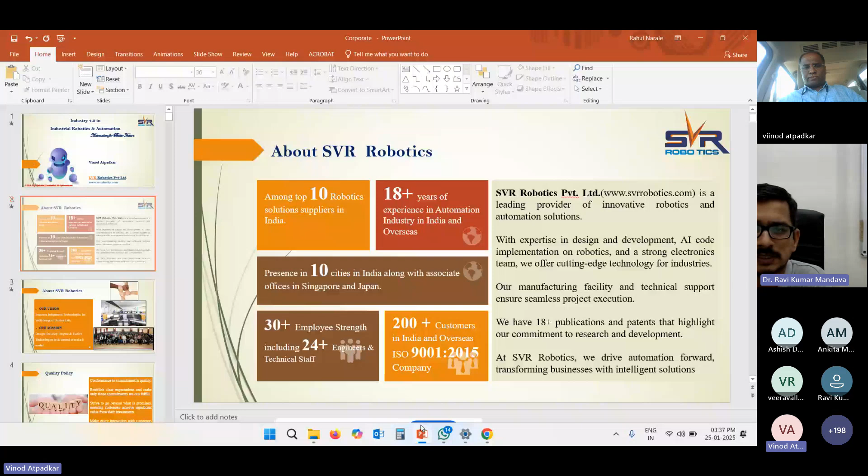Yeah, thank you, sir. Thank you very much. Thank you for giving this time. And it is always good when we talk about the same domain people, where we get knowledge sharing also. We also try to understand a lot of things, what other people are doing, how we can also develop, how we can nurture our product. So we always try, when this kind of events happen, to take this opportunity.

So today's presentation would be on robotics, basically on Industry 4.0. What we are doing, we'll try to showcase you, apart from different applications in this domain which we have already done.

Our vision was very clear: innovate indigenous technologies for the well-being of human life. We thought that whatever we are doing in robotics, we should cater to society, and that's how our mission also evolved.

We are based out in Pune. Our head office is in Pune. We have local offices across India, and basically the salespeople take care of those regions.

Basically, when we started the company, we were very clear that whatever components we are developing, we should adhere to our quality policy. We started with that goal only, that conformance to the commitment is quality. We were very clear that whatever we have committed, we'll do that, and we'll support R&D and research development activities. That's where SVR has been into this domain, and that's where the sustainability has come into this domain.

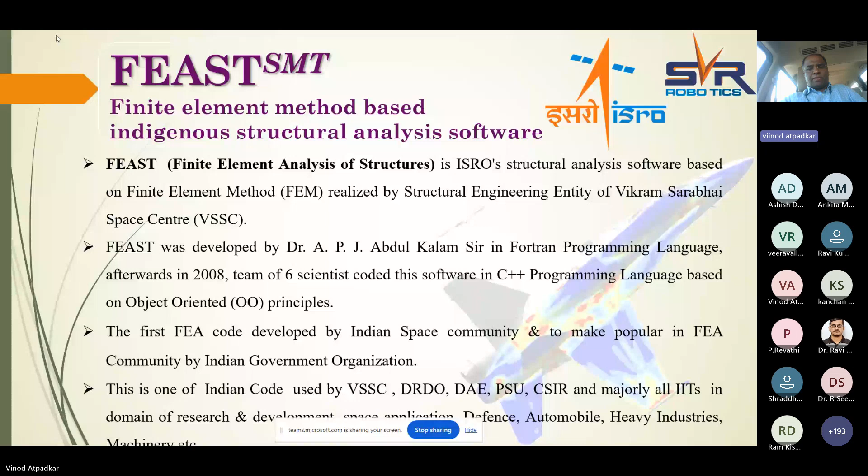So this FEAST finite element analysis covers structural, thermal, linear, non-linear, and multi-body dynamic analysis for robotics.

As I said, with Bhabha Atomic Research we are into cleaning robots. Parallelly, we make small equipment, like small grippers or crawling robots that can move through pipes of 50mm and 70mm diameter, which are two standard pipe sizes. An important function is that while moving, it also has to do inspection. If during rust formation some component has fallen down, that crawler has to bring that component back as well.

So we are developing small equipment for the robotics division at BARC.

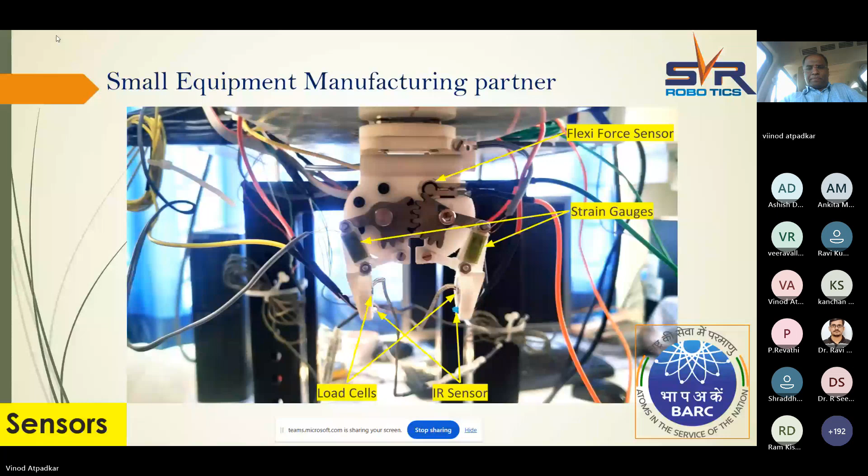Now coming to our main business verticals, we are basically into three core disciplines. One is robotics and automation, where arms, parallel manipulators, or serial robots come in, as well as automation. We have AGVs which help with logistics applications, and then we have a software domain which helps with design development, concept development, and practical implementation. These are the three different verticals.

If I want to look at it from a product life cycle perspective, we are involved in each stage of the product life cycle, starting from the design part, then the manufacturing part, and then the implementation part.

Wherever basically we cater this into robotics, we are there. It may be technical activities, repairing, or development of code, something for an inspection part. When I come to Industry 4.0 and how industries are geared up, you will see the component, they give the different component, you have to analyze that component with your real time component, find out the defects, and then in production if it is acceptable it has to be accepted and go for the next station. If it is not accepted, then it has to be rejected. That's how we are working in this domain.

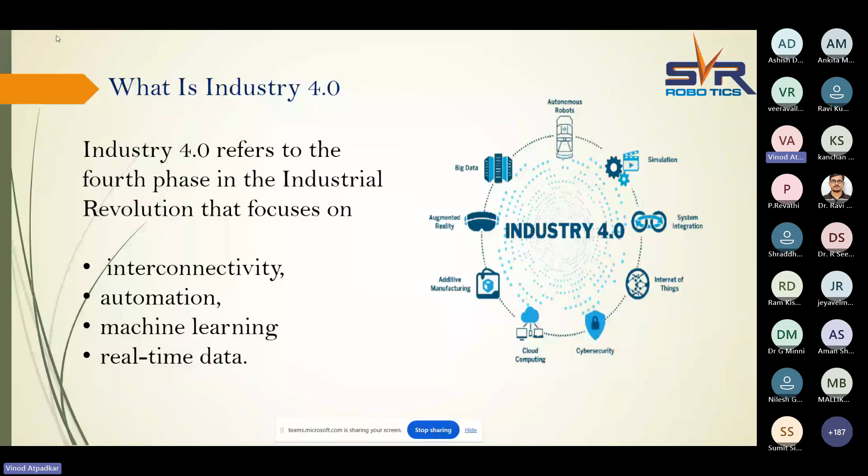As I said, there were three different phases that came into industrialization. Initially it was a mechanical stage, which we call Industry 1.0, where all the things were in a completely mechanized state, like steam engines and all those things. Then electrification came, where the manufacturing process went from mechanical to electrical. Then 3.0, where automation came into the process, where robots came into play.

And now from 3.0, we have shifted to 4.0, where it's not only automation, we are getting real time data which will help the industry increase its profitability. How they can increase their profitability, how they can increase their production, how they can reduce their timing and all those things.

So how is Industry 4.0 helpful in manufacturing? It does things like supply chain management - from supply of raw material to the end product, Industry 4.0 helps keep complete records of where the product should go, what inventory is maintained, what is the dead time of the inventory, when the product will dispatch, and when it will go to the end consumer.

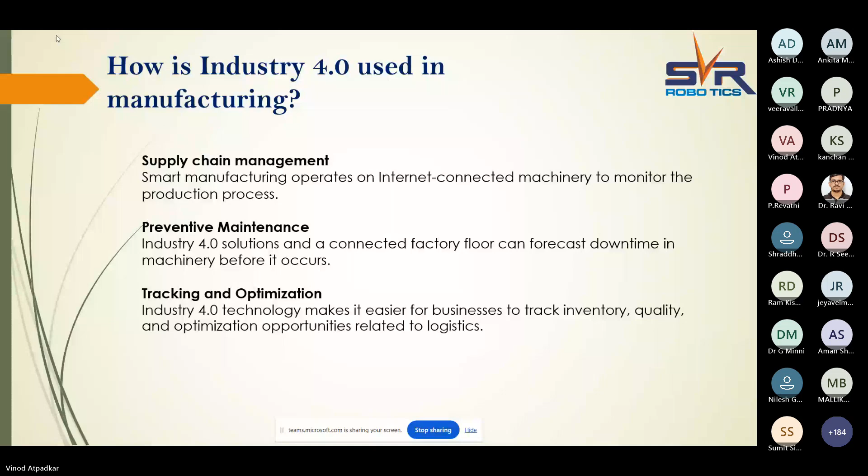What are the advantages of robots in Industry 4.0? Articulated robots or any kind of automation help increase productivity. As mentioned, there's a problem today in the market of getting the proper person at the proper time and place. Getting skilled labor into the market at the correct place is difficult - a person can be skilled, but is he skilled enough to do my specific work? So getting such a person is problematic, and robotics have helped here to increase productivity.

With the help of robotics or automation or any robotic components, we can keep complete data - how much time of work has been completed, what products were processed, how many working hours the robot worked. We can have complete data collection.

The initial cost for implementation of robotics is high, but if I calculate the ROI and the complete working life cycle of the robot, the total cost is reduced.

Quality also increases, as getting skilled labor is difficult, and there are chances of mistakes since we are humans. But on the robot side, mistakes only happen if there is a fault in the component or in the robot itself. If proper maintenance is done, the complete system will work fluently, producing good quality products. In this way, robots are helping in Industry 4.0, and companies are getting more profitable.

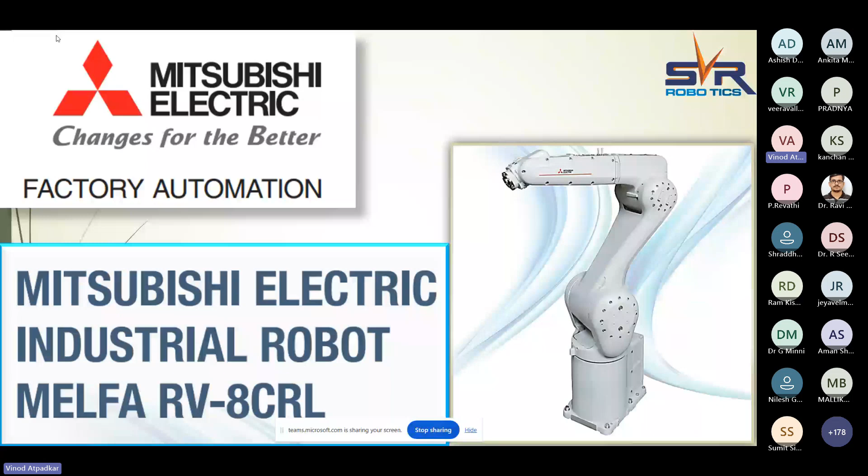As mentioned, we have association with Mitsubishi and Fanuc. We provide articulated robots, robotic arms - horizontal robots, vertical robots, Cartesian robots - whatever is as per the requirement of the industry. These arms can be used for different assemblies. To date, we have catered to the welding industry, headlight gluing industry, pick and place industries, different painting industries, and assembly industries. Wherever robotic automation is required in an industry, or a complete automation process is needed, we have catered there.

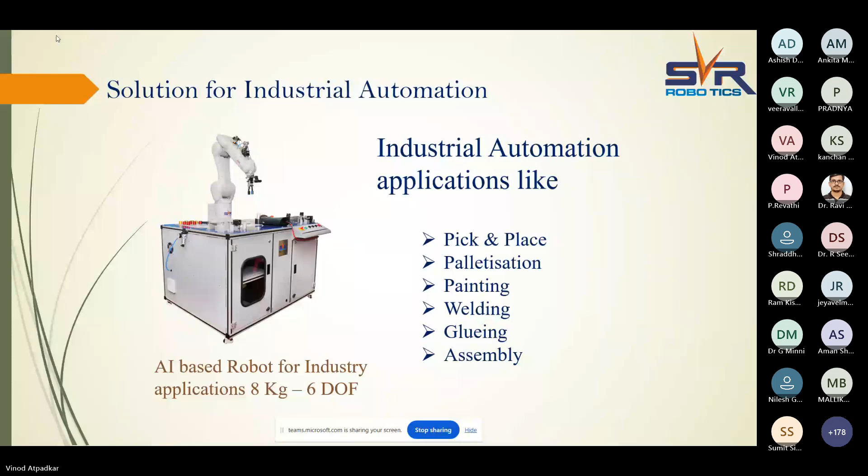Along with that, we also provide vision systems or AI systems. In some companies, we had to do a scanning process where the product had to be scanned and checked whether it was okay or not. If not okay, what kind of fault was in the product - whether it was a manufacturing defect, an end finishing defect, or any other defect. For these types of systems, we provide different kinds of vision systems or AI systems.

So this was one of the examples of what we provided for one industry, for sorting of components. This was a research lab where they wanted to sort components based on colors.

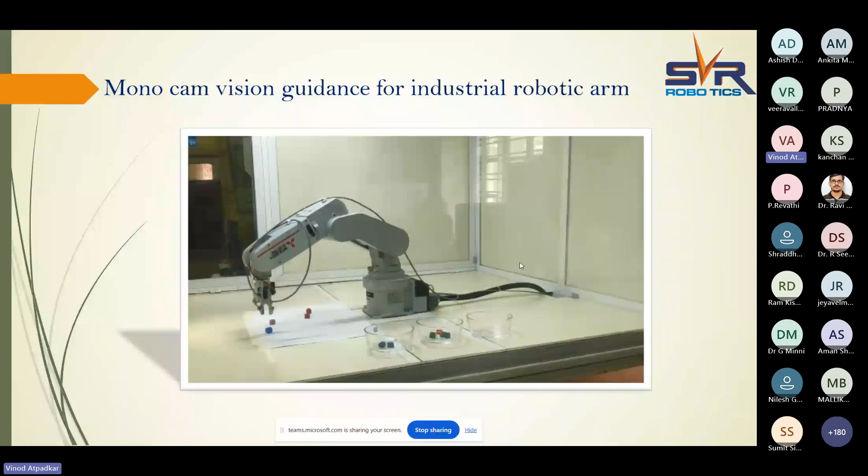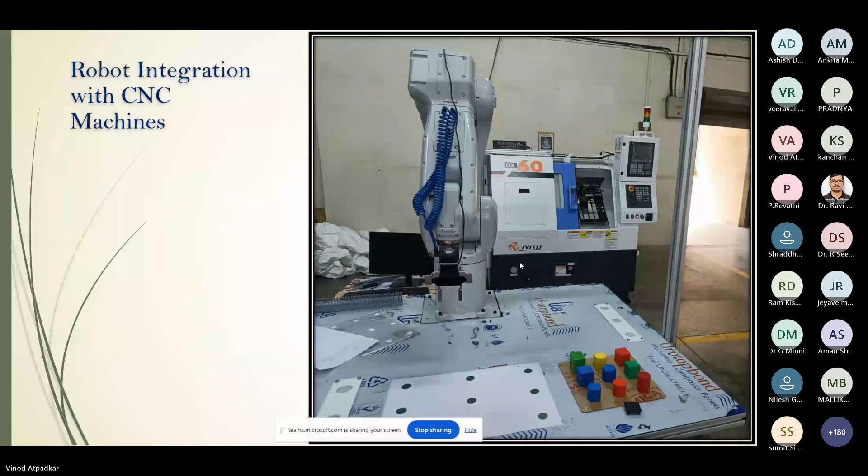This is another example where we had integrated the complete automation process, like different robotic arms with CNC machines, where we did different applications. Initially, the drilling application was done, then the milling operation was done, and later there were two different robots to check the quality of the product, whether the operations were done correctly, and the assembly would take place.

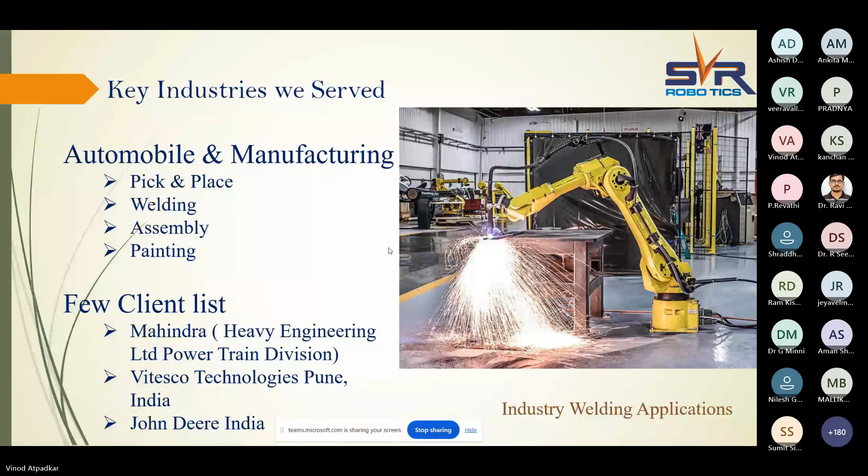So this is an application of a welding project using a robotic arm for welding.

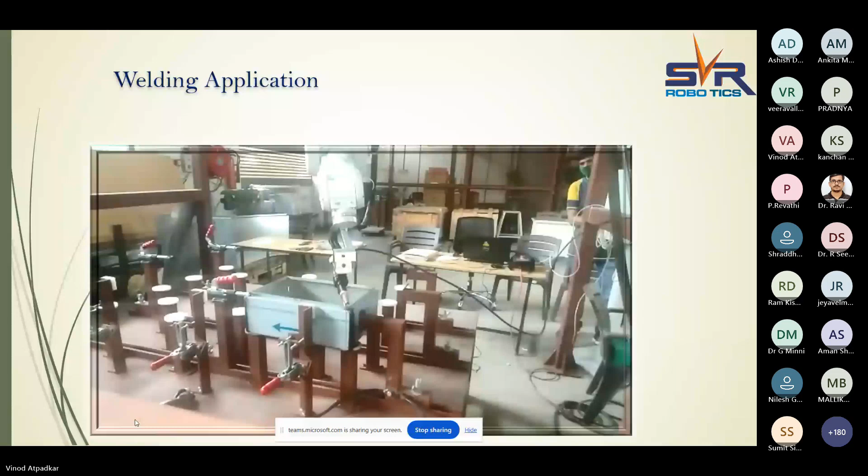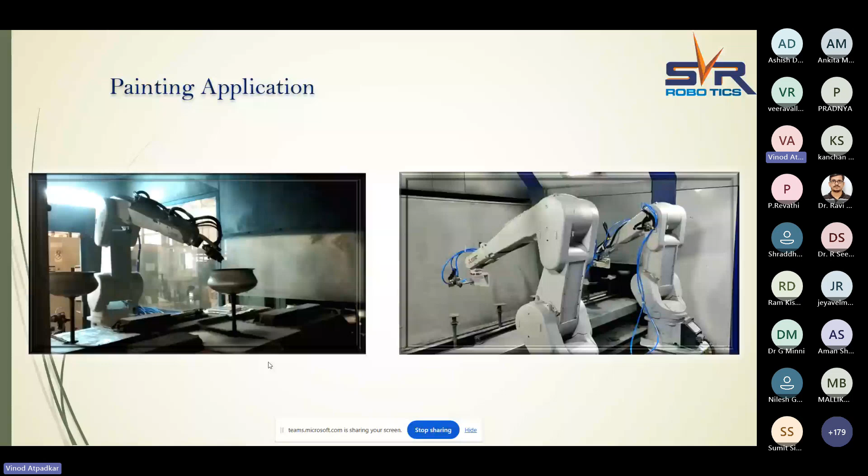The purpose of showing all this is demonstrating how robotic systems are helpful in industries, how different robotic arms are used in the industries, and how they are increasing the profitability of the companies.

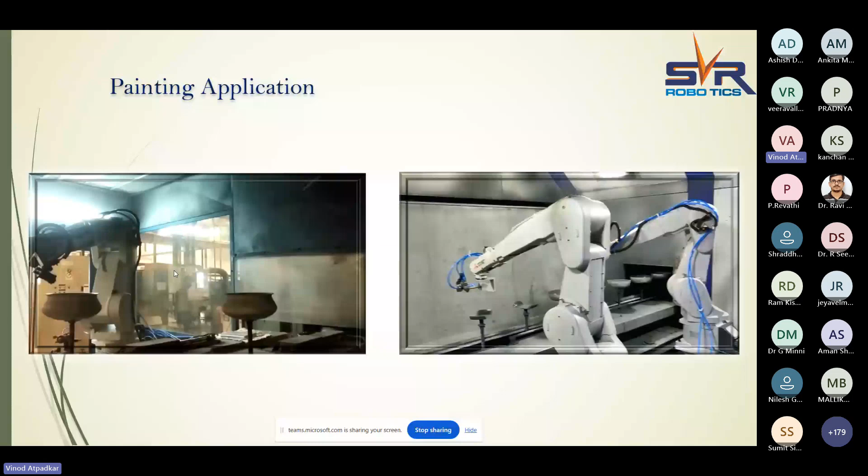Here you can see both of these robots work in collaboration with each other, detecting whether a proper coating has been done or not, and if the first one misses out, the second one continues with the coating process.

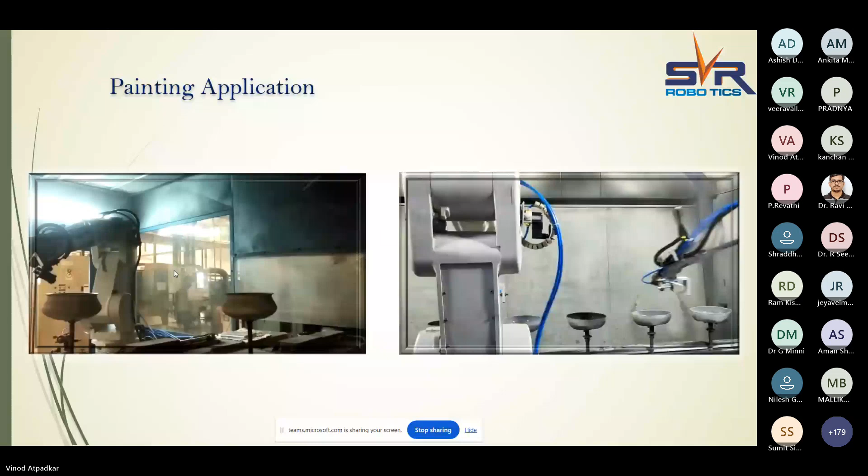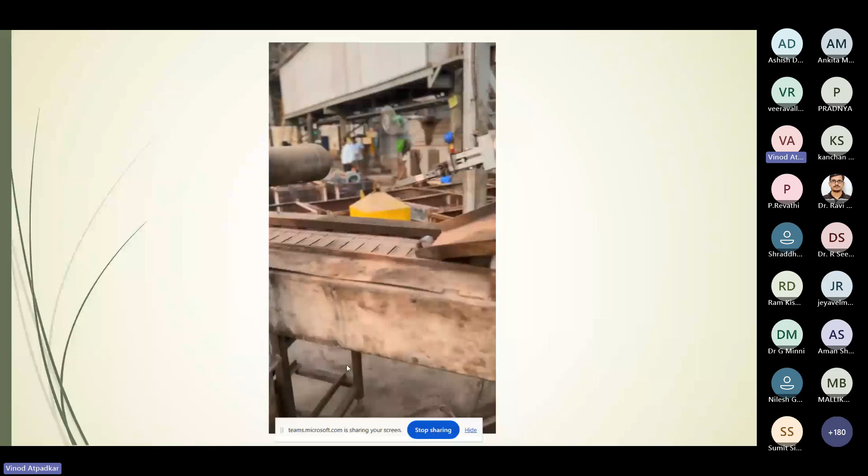So these are some of the images of the actual robot installation at different companies or organizations.

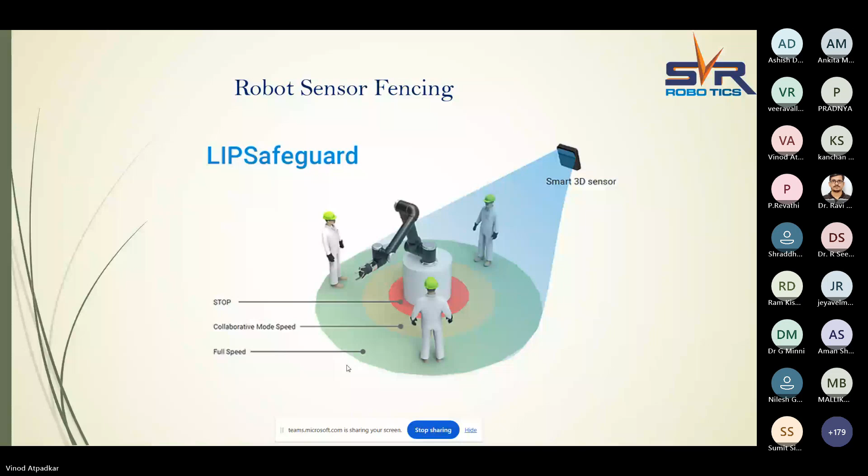We provide different kinds of articulated arms for different applications, for industries and for the education system, where we integrate different kinds of operations as required. We integrate different kinds of vision systems, for color sorting, shape sorting, and we can do different types of applications like welding and painting.

This is one of the applications where we have used a robotic arm for 3D printing.

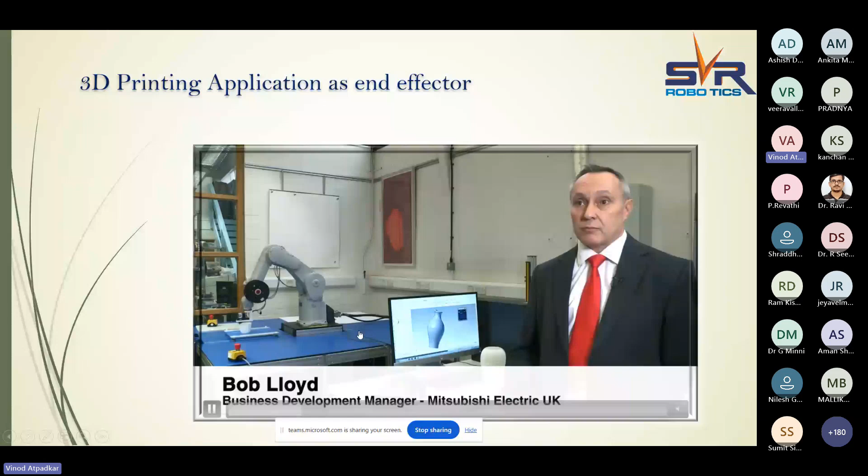Different kinds of robots have been provided from our side for different applications. We cater to industries like the hotel industry for preparation of different components, and we have also catered to automobile industries.

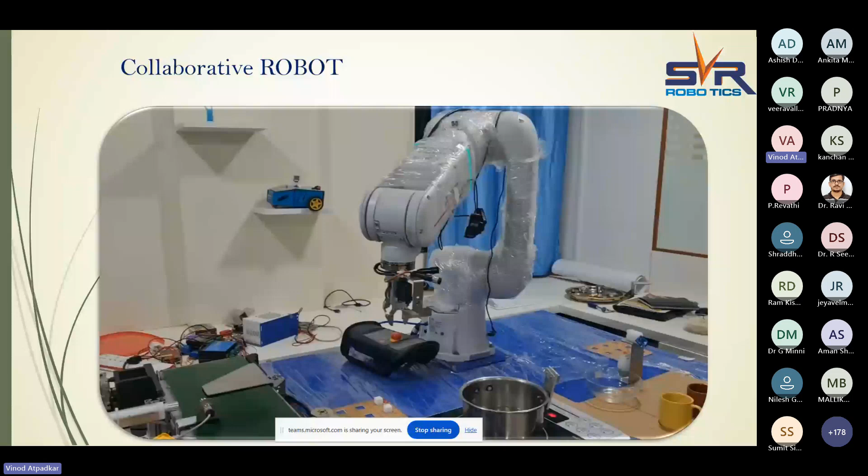So these are the different kinds of robots that we provide for the companies, and the complete setup is given.

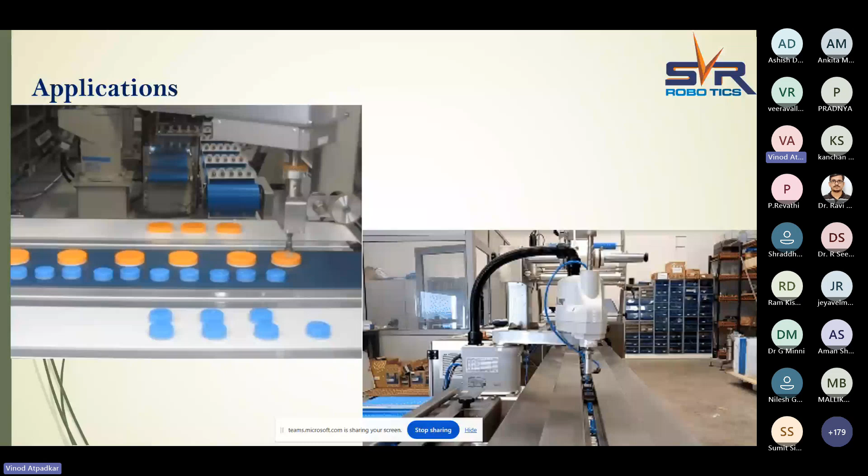These are applications where pick and place has been done depending upon the colors, sorting based on the colors, and then packaging it.

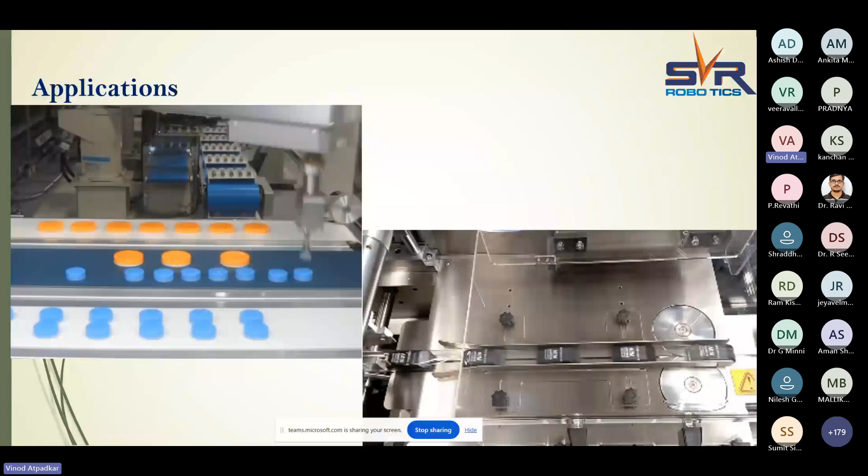Along with all the industrial robots, we provide different kinds of end effectors that are helpful for different applications. We provide industrial robots for painting, with different end effectors like pen holders, brush holders, and spray painters. We also provide laser engravers, which we buy from a third party and integrate with the industrial robots for different engraving applications.

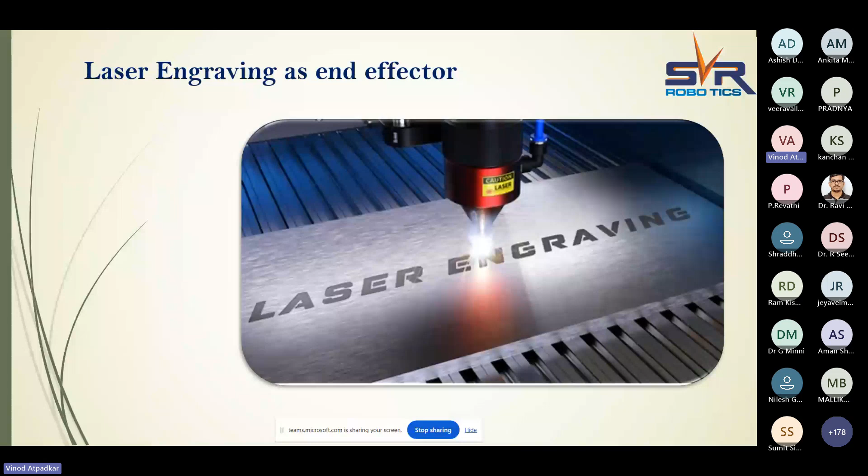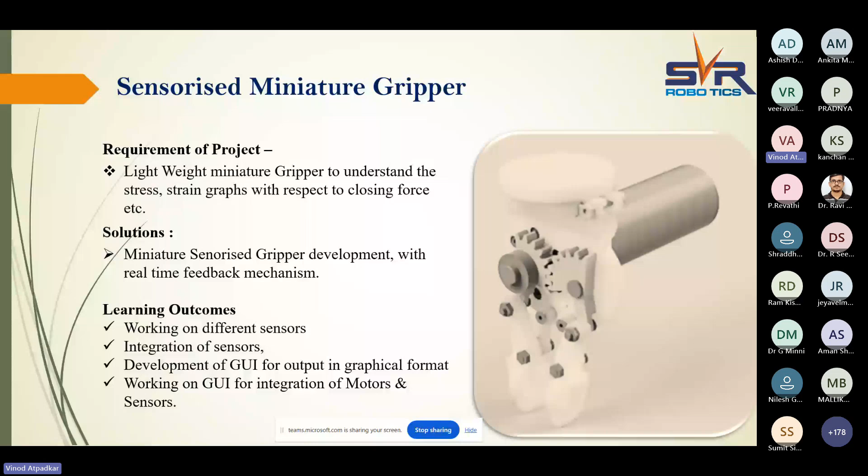Our major customer is Bhabha Atomic Research Center, as they do different types of R&D for their products. These are some of the images of the grippers we provided to BARC.

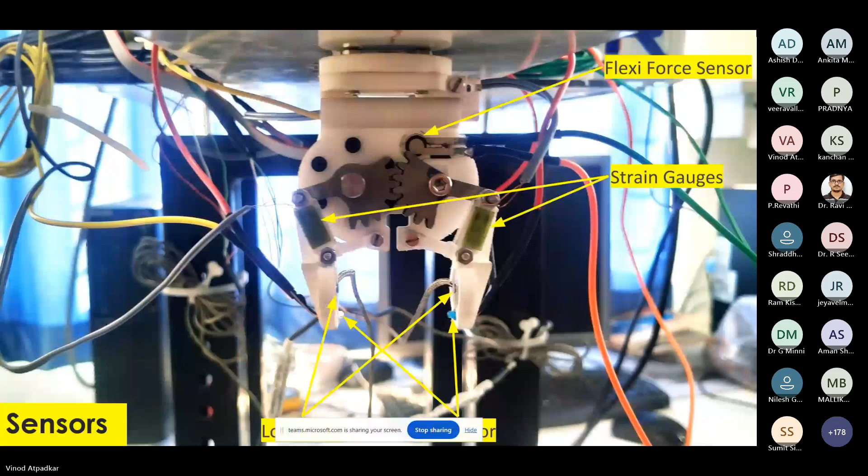These are the strain gauges mounted on the grippers. At the front side, the blue color is the IR sensor which would detect whether the component is present or not. At the center there is a load cell which would detect the force applied on the product, and we also had a flexi force which would detect what kind of deformation takes place on the gripper during the gripping action.

These are some of the grippers that have been developed by SVR, designed and developed at SVR Infotech. These are our patented grippers, we call it Grabo. We have these grippers ranging from 1.2 kg to 10 kg payload.

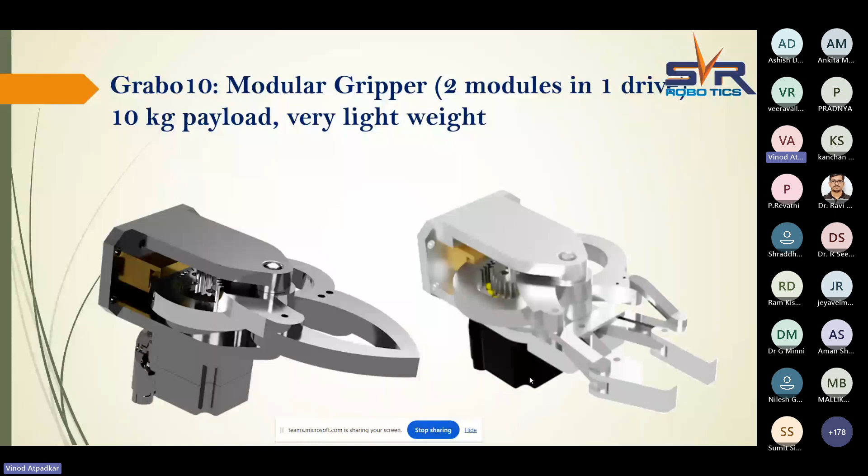The highlight of this type of gripper is that they have replaceable jaws. Many electrical gripper companies have fixed jaws. Pneumatic grippers have replaceable jaws, but electrical grippers typically don't. So we designed and developed a complete electrical gripper with replaceable jaws, where the base body remains the same and the top body or jaws can be changed as per requirement, like parallel jaws or curvilinear jaws.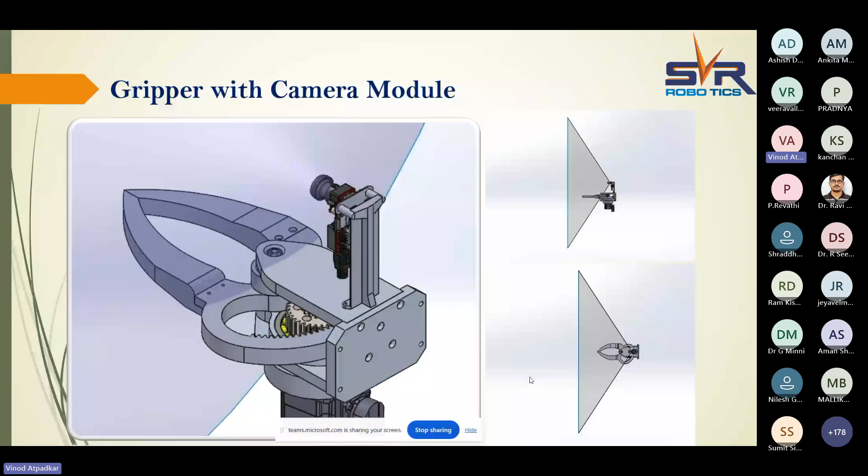Different sensors or modules can be integrated with the gripper for different applications. So these are the actual grippers, what they look like.

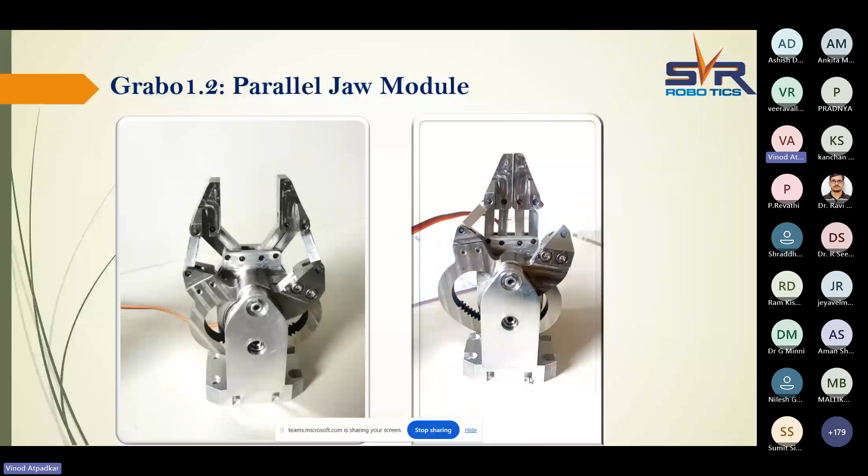For many industries or education institutes, we provide a gripper setup helpful for organizations to learn the quality of the gripper, the maintenance required, the maximum payload it can take, and the wear and tear happening in the gripper. This is a PLC or microcontroller based complete control system where we can study the end effector stage, what wear and tear has taken place after multiple uses, what life is left, or what maintenance is required.

As we move towards Industry 4.0 or digitalization, we also provide virtual reality or augmented reality systems with the complete setup, so the industry can get a complete feel of how the machine process is going on, what preventive measures to be taken, and complete data of the system and process collected within it.

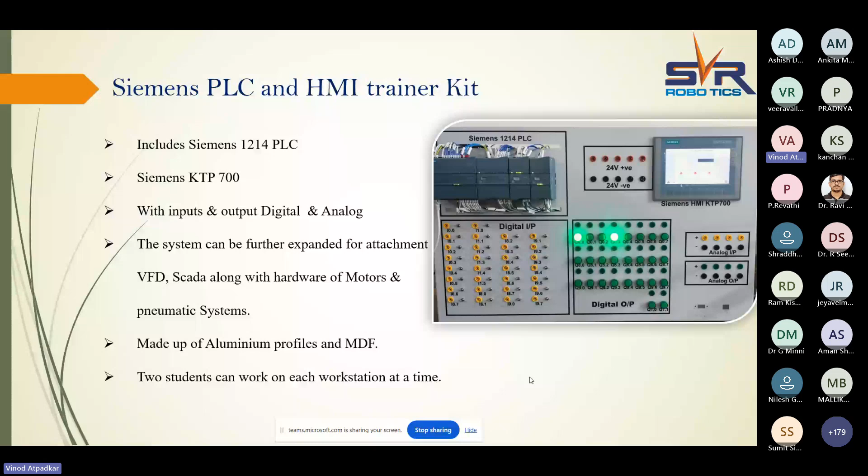As mentioned earlier, we provide different controllers for different applications which help in the automation process. Like we have VFD controllers, SCADA kits, and many different controller kits for different applications like packaging and material handling.

We have developed different kits for an automatic streetlight system for one or two cities in Maharashtra, providing complete automation with an auto dimming system for streetlights, which starts or stops depending on sunlight, switches on or off depending on the outer light, and changes intensity depending on the ambient light system. So this kind of different application is implemented via SVR Robotics.

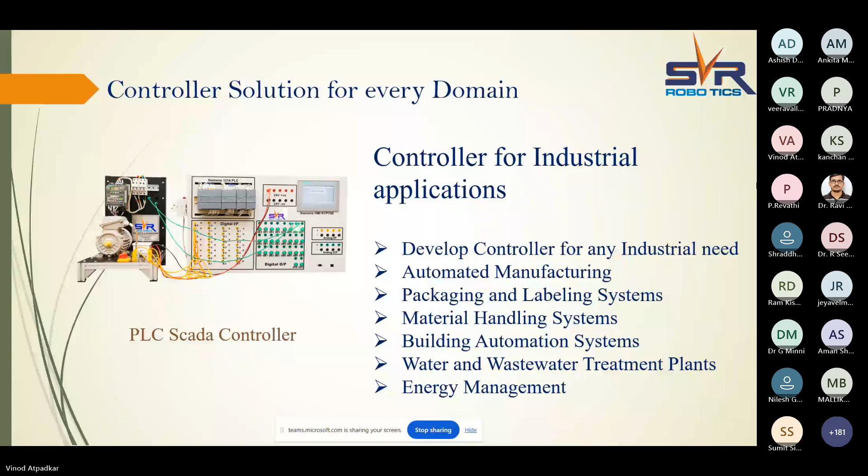These are different types of kits we provide for study of Industry 4.0 systems or different automation processes, like an application trainer kit for VFD, and a trainer kit for elevator systems, showing how the elevator works, issues during elevator designing or programming, what is dead weight, counterweights, and the governor system to be operated. For education systems, we provide such kinds of kits.

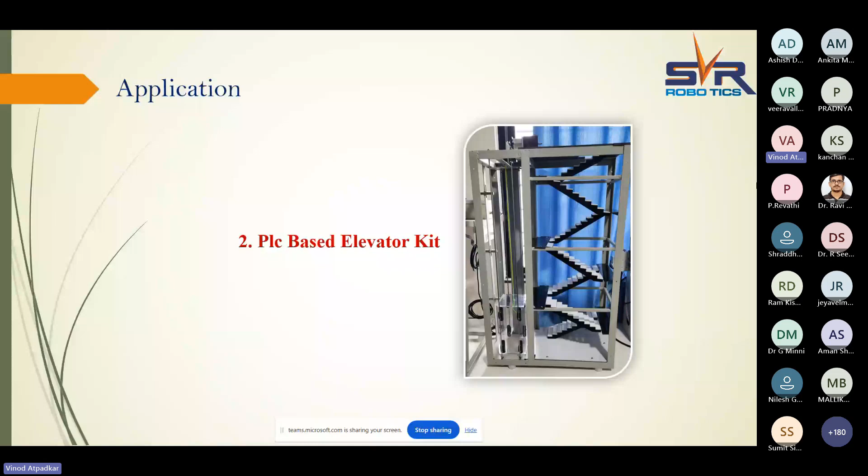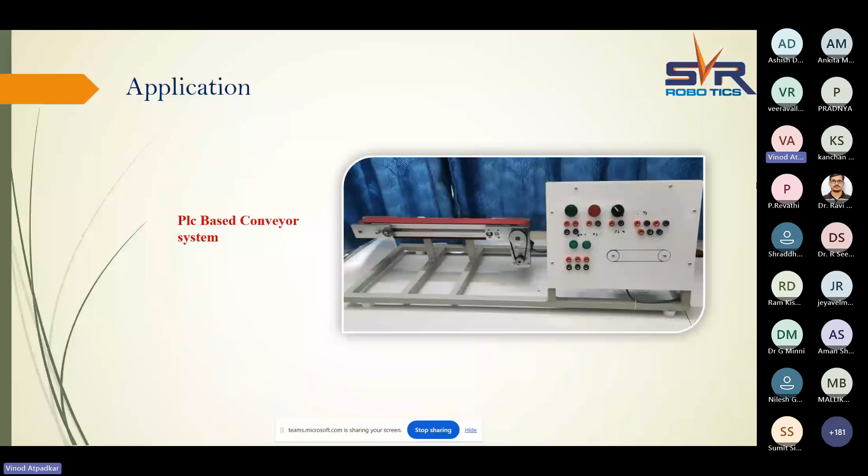Conveyor kits show how to operate the conveyor system, how to control it through PLC or based on IoT. The XY Cartesian robot lets us do all the programming for controlling the robot using the XY system. Linear, that is what we call a linear system.

Water heater kit, water level system control, then a complete SCADA process. As I said, we had to provide

street light operations for two of the cities in Maharashtra. We also have done the water treatment system for water treatment and water flow control system for the same cities, with complete SCADA process.

Here the SCADA, the automation, the robotics, and all this comes together to form an Industry 4.0 system, where we get complete data on how the flow is going, where there is a leakage, how the control valve should be controlled depending upon the flow, what are the water levels, where water wastage is more, and all those things were controlled using this system.

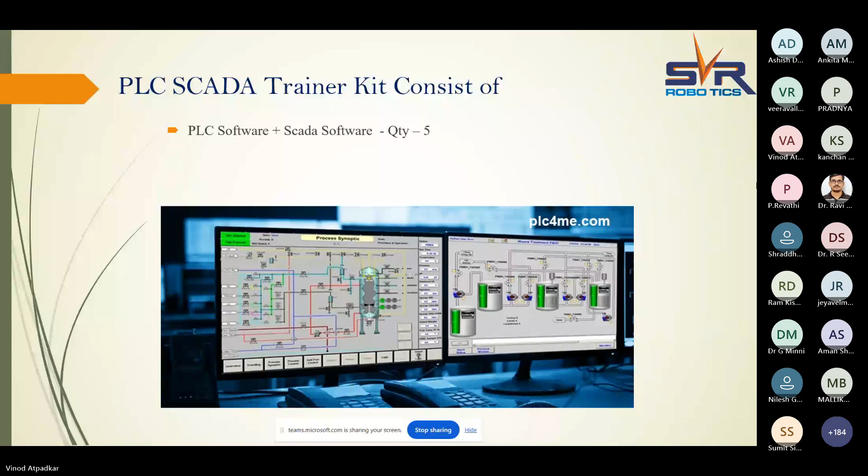This is an application where we had provided a complete system for water bottle filling.

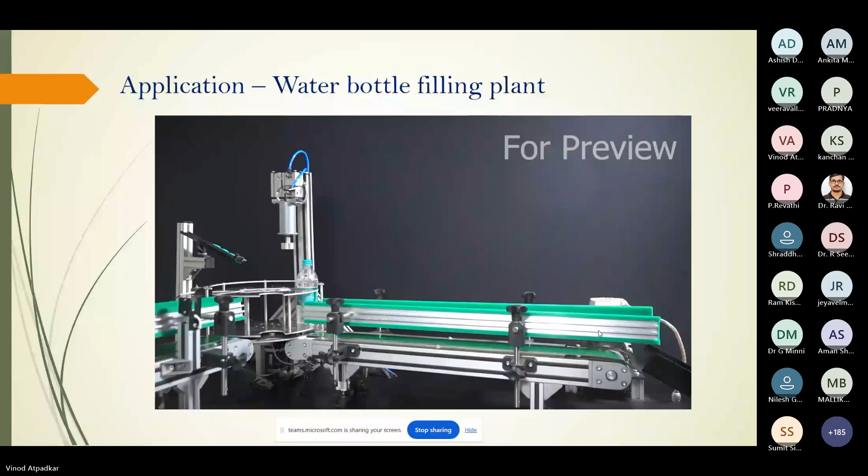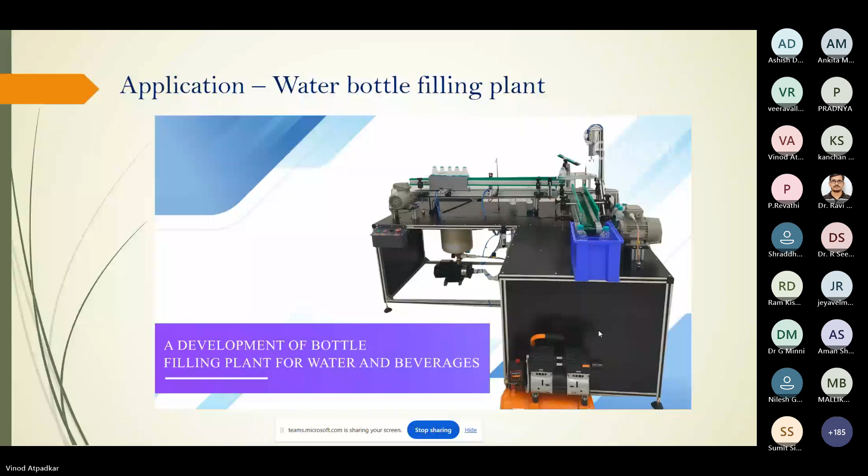Next, what we provide is an industrial flexible manufacturing system. As I said, we provide a complete automation line setup. Along with that, we provide small setups for small industries where they can study

or do the complete flow setup of any of the objects, like in case they want to do production, what is the real time monitoring, predictive maintenance, or colors, or any kind of automation line, whatever they require. So this is a setup we provided for one of the companies,

where they wanted to do the drilling operation and do the sorting based on the inspection results of the drilling, and then sorting based on the color and sorting based on the material.

As I said, we cater to different Industry 4.0 applications where automation comes in, where mainly the robot comes in. So these are some of the setups.

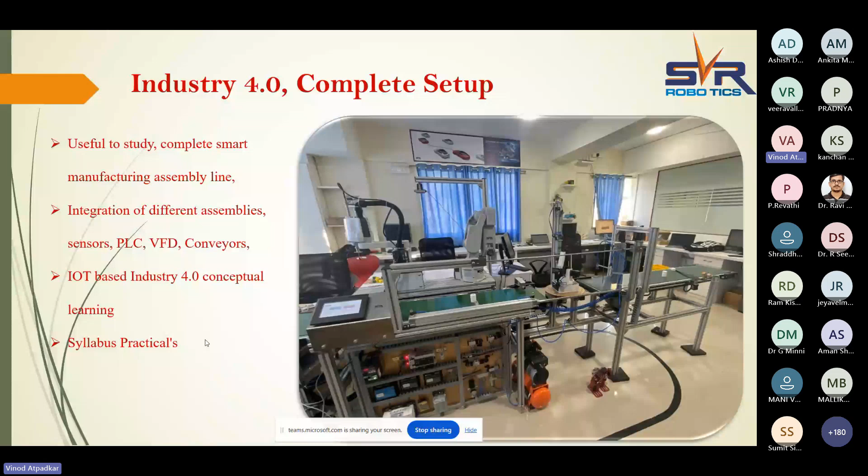These are the setups done in our offices so as to study the different automation lines, how they work, to simulate how the operation should take place.

This is the application developed in our office so as to simulate how the sorting could be done depending upon the color.

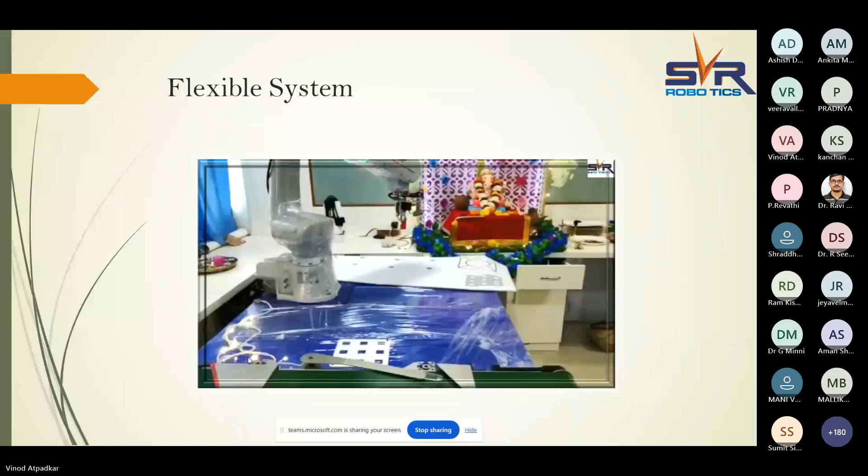As we say that there is an Industry 4.0, at the same time we also require skilled operators to operate all those things. So we have small kits which provide training for the operators, how to operate the system, how to work on the PLCs, how to work on HMIs,

how to integrate these sensors, how to check the modules, how to read the data. So for those kind of things, we provide such kind of small kits where the operators will be able to study the complete setup, and then they can go on to actual working of the components.

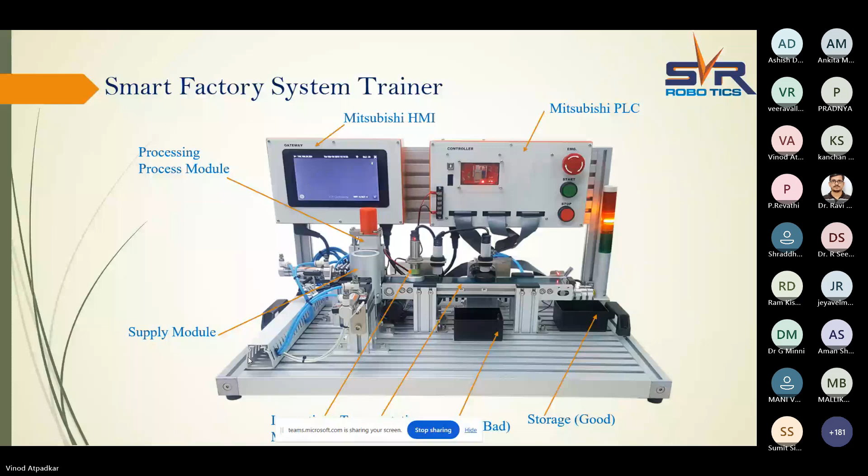Along with robotics and automation, we provide automation related trainings, hydraulic related automation trainings, and different kinds of hydraulic and pneumatic kits, which will be helpful for the operators or students for their different applications.

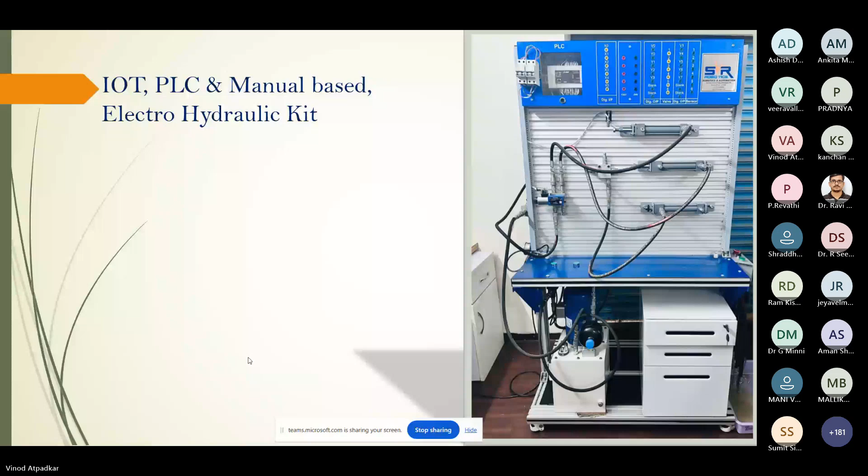This is a photo of another hydraulic trainer kit. These are the different kinds of products we provide with the hydraulic circuit, like hydraulic press control, how to operate it, as there are many hydraulic presses in the market.

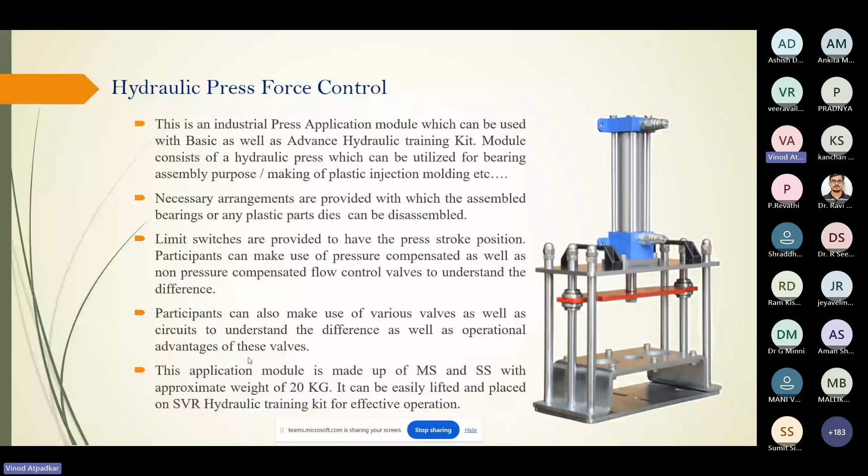And then along with that, we have this RoboMuse, which we call an AMR, which has been developed here at SVR Robotics, which we use for different applications. The RoboMuse is available for a payload from 10 kg to 100 kg.

So we have this AMR deployed at different shops for different purposes, at different workshops or different industries where they are used for carrying different types of loads.

These AMRs are completely autonomous, where they do their own path finding depending upon any obstacles present in front. So these are the different AMRs we provide, which are also part of automation, where they help in completing a cycle, the automation cycle.

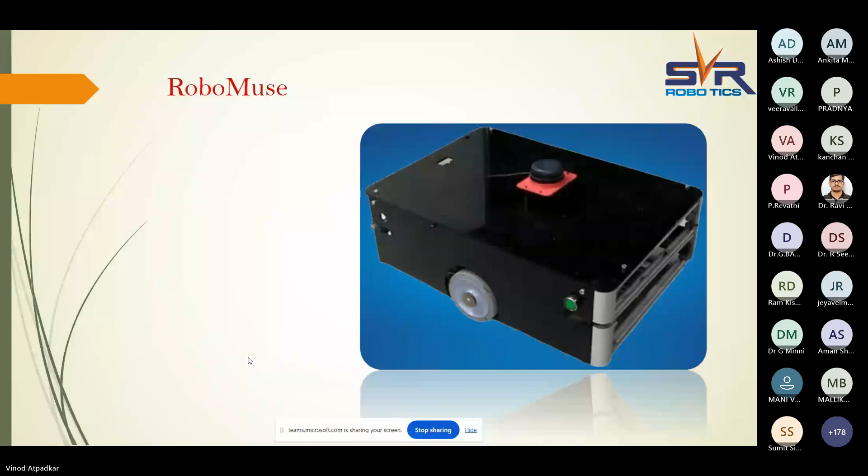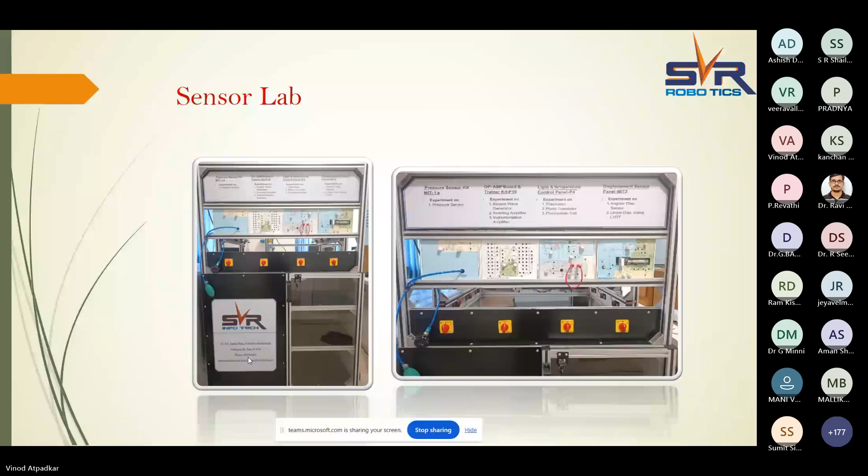And these are some of the other mobile robots what we provide for different applications, mainly provided in R&D labs for study of the sensors and study of different microprocessors.

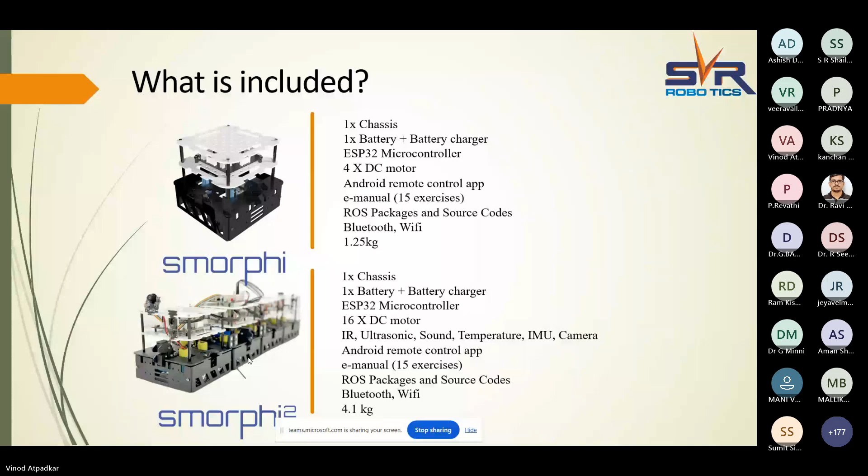Along with the design and development of automation, we also make sure we have different publications, paper presentations, so that more knowledge is gained and more research and development can be done. We have two patents also, like the gripper design I spoke earlier. We have a patent for a groundnut shell removal machine, which is not an electrical or automatic automation product - it is a completely mechanical, household product which we have designed and sell for removal of groundnut shells in the house.

So the reason we say we are different from others is that we not only work with automation, we also work with different kinds of innovation. We design and develop various things required in the market. We have associations with multiple brand companies like Mitsubishi and Fanuc, so that we don't provide any faulty components. We have expertise in our products, so as to provide complete support to the customer after sales, and we have good knowledge in robotics and automation.

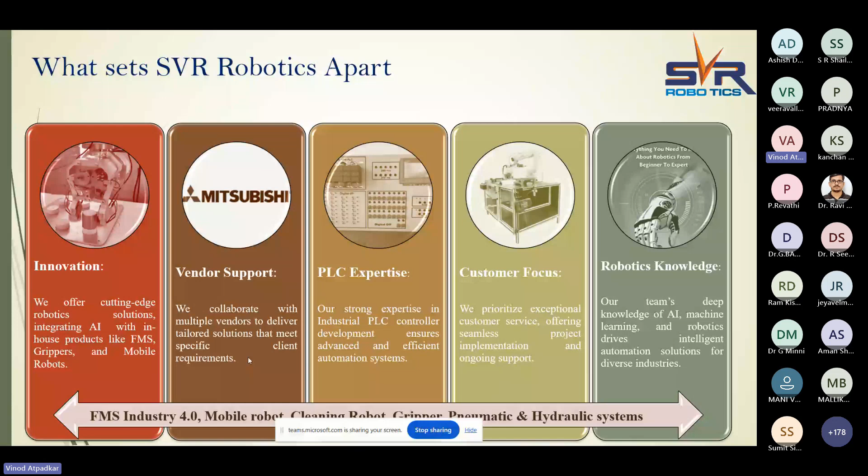As every organization requires proper hand holding to move forward, we have two mentors who are well experienced in their field. The first is Dr. Debanik Roy, senior scientist in BARC and remote handling and robotics. The second is Dr. S.K. Saha, professor at IIT Delhi, who developed the Robo Analyzer software and has good knowledge in robotics and automation. They have been a continuous helping hand for us in design and development of new ideas and innovations.

This is what we provide as technical support: we do training, we do FDPs, we do continuous visits and all these things. Our educational customers include IIT Bombay, IIT Palakkad, IIIT Nagpur, Symbiosis, and others like CTTC Bhubaneswar. We have worked with CTTC Bhubaneswar and World Skill Center Bhubaneswar. So these are the different customers we have worked with.